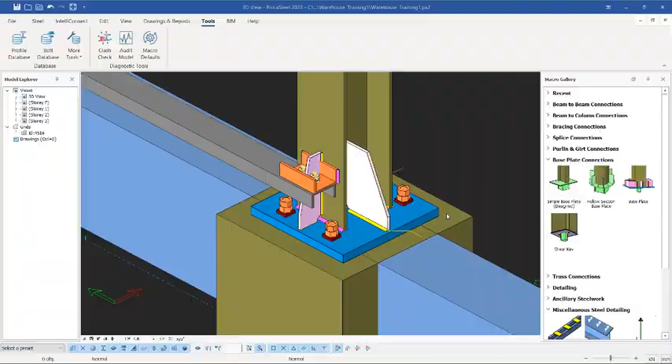We are going to be learning how to create a base plate with stiffeners, just like this. If you check closely, you'll notice that this stiffener is actually clashing with these cleats right there, so we are going to be correcting this as well.

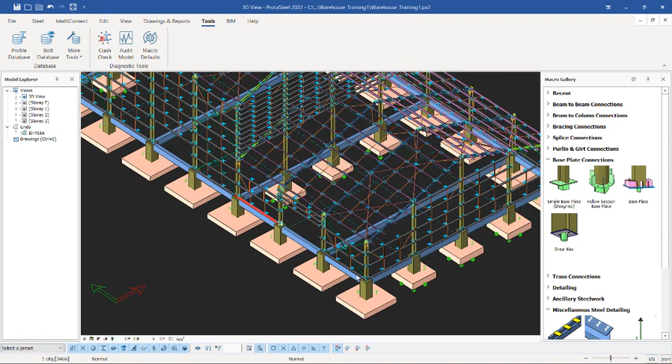In the next lesson, we will learn how to create drawings. I don't want to use this structure to create drawing because it is too large, so it's going to take longer to create drawing with this. I'll use a simple structure to actually show us how to create drawings in Prota successfully. But for today, it is base plate, and to correct this, we are going to be making progress into the presentations.

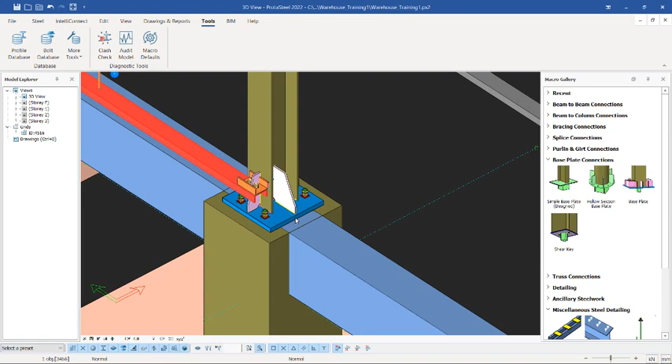So at first we will navigate to the next base, where we will be placing the base plates. Let's say, for instance, we take one of these. Let's say this one. Now, if you check over here in the macros gallery, you have base plate connections right there.

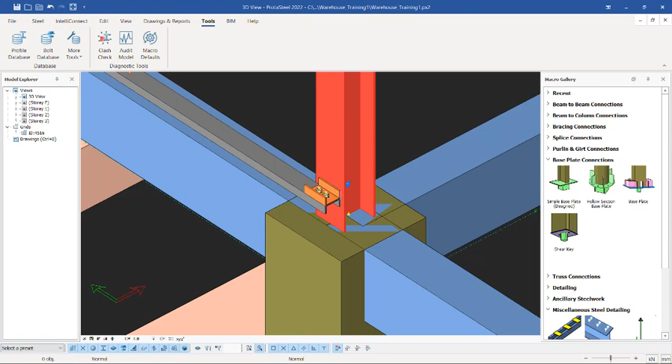Various options, but this is the one we will be considering. Once you pick on this just once, come over to the stanchion right there and click on the stanchion. You have it placed like this. At default, this is what you will have as your base plate. You can see this other one is actually edited, and I will be showing us how to do that successfully.

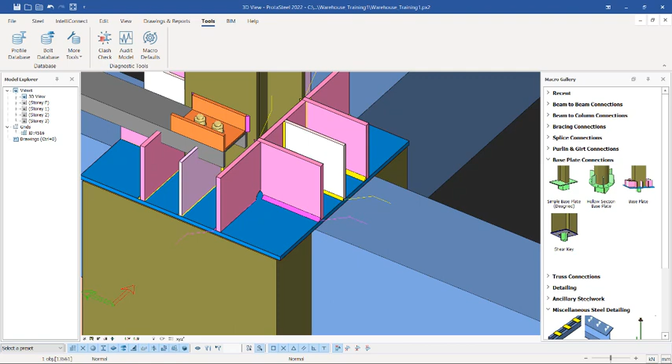Having placed this like this, what you just need to do is select the plate itself and then hold the control key plus M on the keyboard. This has selected the macros that form this plate successfully. Just hit the enter key on the keyboard and give progression time for the macros gallery to come up just like this.

This is the macros dialog. Get back to the figure right there. In this figure, you will notice some stiffeners here. This provision is meant for the stiffener, and this provision is meant for the base plates and the stanchions. How offset you want the base plates to be from the stanchion, you set it out here, but we'll be doing some setting right away, so I will be showing us what we will be doing right there.

So we have the first one, P4, which is the first stiffener, which is this one. We didn't need it, it is this one you see here, this one, so we need to uncheck here to get rid of that. We also didn't need the one at this point, which is P1, so you uncheck here. By the time you click on apply, you check the changes in these provisions. So I click on apply right there, and you can see the changes. So we are not having the stiffener by the face and the side of the stanchion successfully.

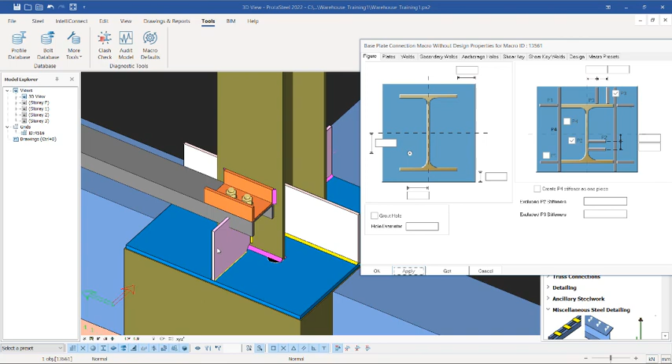At this point, we want to have an offset of the end of the base plate from the stiffener to be 100, so you can click in right there, 100. This is the setting that I said we are going to be doing in this presentation.

Having said this, you now go to the plate itself, over here in the plate end plate thickness, so we get the plate thickness. It depends on what you want; I want it to be 20.

Then you have P1, to be 10, which is stiffener one. P2, which is stiffener 2, to be also 10 as well. Stiffener 3 to be 10 as well. All right, so these are the stiffeners that you see here, stiffener 1, 2, 3. The first stiffener is the one we actually deleted.

Now, the first height of the stiffener we will take it to be 250. The distance between the stiffener and the end of the plate, we take it to be 10 millimeters, and then the second height of the stiffener, it is going to be 50 millimeters. So we come to the chamfering of the stiffener, to be 50 as well for this one. This provision will still be 50, and then we still have a 10 right there, and over here we will have 50 right there.

Okay, just like this, and then we have, let's take this to be 100. So this one now is this stiffener here, the one at the other face of the stanchion.

So we click in over here of 250, and then we still have 10 right here, and we have 50 here, and over here we have 50 as well. Okay, so this is the stiffener settings.

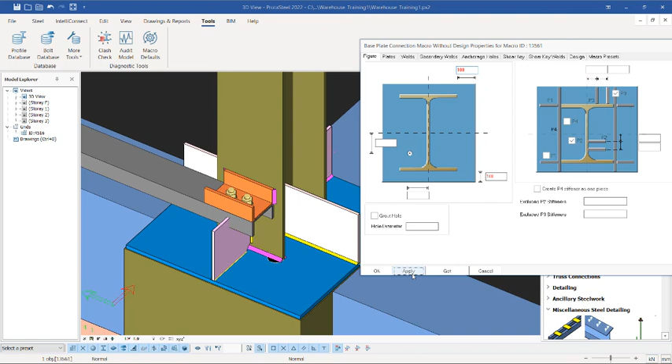So the next thing we will be considering, after making all of these changes, you have to update - click on apply to actually update. So now we apply, you can see the changes right there, successfully, just like this.

Then if you come over to the plate, these changes as well is being applied to this. So if I click on apply it, you can see that it's been applied successfully. I'll go back to the anchor bolt, then I'll make my changes right here.

So I have already checked this plate type 1. The plate type 1, the holes that are in right there are within the stanchion's perimeters. So if you come over here, you can see P2 right there - this P2 simply means you can create a hole outside of the stanchion successfully.

So we will be having a distance from the center of the stanchion to the first hole. We have it to be 40 right there. Okay, so over to this side, we still have it to be 40 as well - 40 millimeters, all right.

So if, for instance, we have it only 2 holes, which is for this plate type 1, just have to click on apply right there. So you have a hole right there - you're not seeing it, okay.

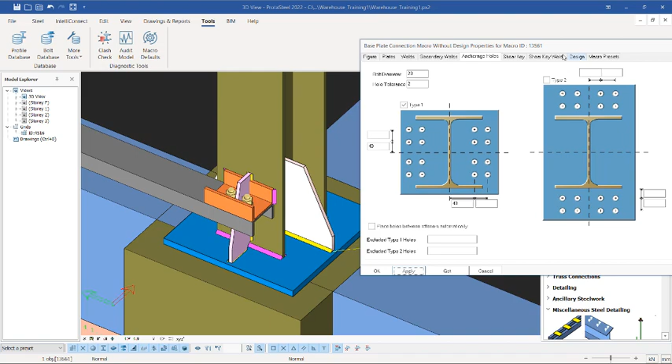But by the time we finish this now, for instance, I close this and we turn this, you see the holes here, one right there and the other one, which is 2 holes, which I think is okay for this stanchion. But if you want to add additional holes, maybe outside of the stanchion, I will be showing you what you do.

So select the plate again and then do the Ctrl M right there and then enter on the keyboard to bring up the property dialogues of the base plate successfully, just like this. Okay, so after which, if you want to apply another hole outside there, you can just check this type 2 right there.

And then key in 40 here, click on apply, so it will give you a hole in line with the other one that is inside of the stanchion.

All right, so if you want to have another hole, maybe multiple holes, or you want the spacing to be changed, you can actually change this 40 to change spacing. But if you want to add the additional hole and the spacing of 40 in that direction, so you can just click in 40 from this point and click on the apply options. So you have about 4 holes in that direction.

So if it's closed here now, then click on apply here, because we are good to go with this. Okay, so click on the OK options.

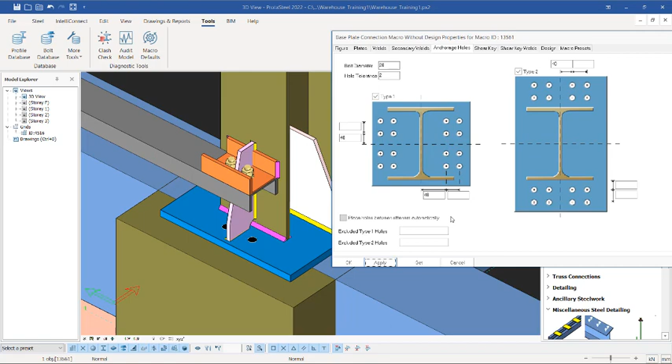If you click on get, this setting is going to be saved to this program successfully. And once it's been saved, there is no way you can set it again. You just use it to place all the provisions you are supposed to have your base plate successfully. So click on get and apply that.

Okay, so just like this, you now have this, so you can turn this and see the number of holes - 4 holes were placed. Okay, so after which, the next thing you will do is to place your anchor.

The anchor bolt - so you right click on the anchor bolt, so it takes you to the anchor bolt property dialog. So over here you can set the length of the anchor bolt, you can set the diameter. The diameter here is going to be 20 because it is the 20 holes that we created with 2 millimeters tolerance. Okay, so we are okay with this.

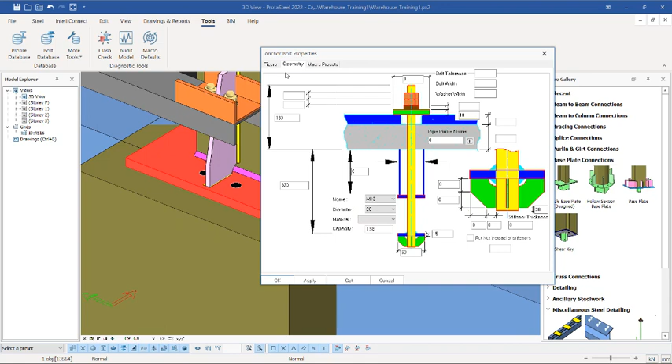Can go to the figure and be able to change the type of anchor bolt to C type or simple type.

Let's use the simple type. After which, click on get, apply, and okay. Once you do that, pick this anchor bolt again, right click right there and pick the plate to insert the anchor bolt, just like this. This has been placed successfully, you can see now.

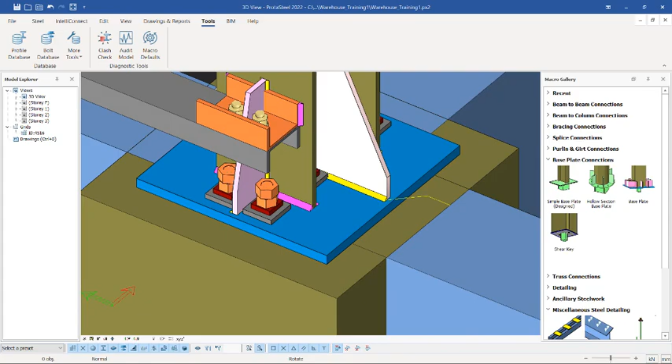If you want to continue to place these base plates right away, you can easily come over to these provisions and then pick the base plate, select this stanchion to place it. After which, pick the anchor bolt, just as I've told you earlier that we have saved it to the system, so we wouldn't have to make any changes anymore.

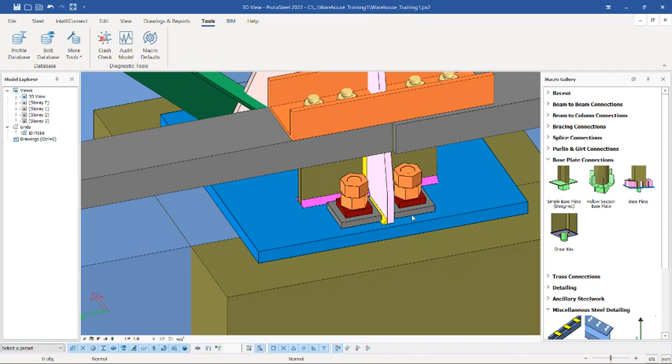But if you check, many things are clashing right here, but I will show you how to resolve this clashing, which is the next thing we are going to be looking at in this presentation.

Having got this successfully, we are going to be removing these connections first, at this point and this point. Once to remove this connection, you can't just select it like this and remove.

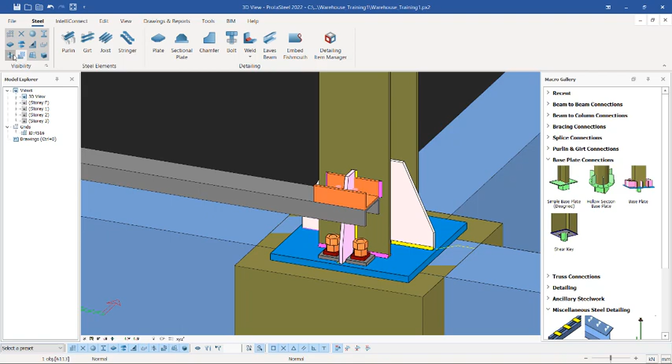You have to activate the macros. If I go to the Steel right there, see these macros, this one. Click on it, so it shows like this. This is the macro. Select it, right click, and then click on delete right there. Options to delete the macros up, and then come over here and do the same thing with this macros up, just like this.

Since we're having this clashing here, we're going to be moving this upwards. To move this upwards is not a difficult task. You just have to double click on the girt right there, come over to where you have the Z direction, which is the upward direction. You prefix minus maybe 150 right there, let's check 150 and see how it goes. You have to prefix 150 in both start and end of the girts, just like this.

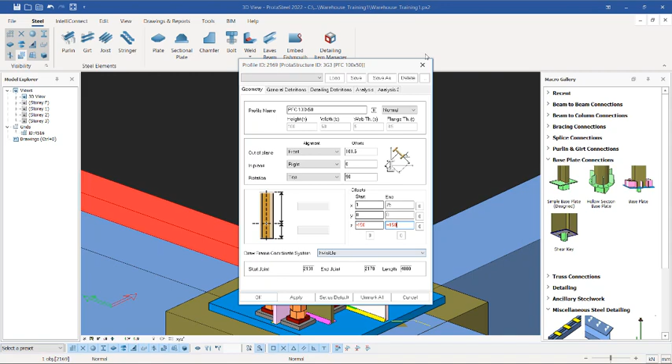After which, let's move it this way so we see the movement of that. Click on apply, so once you click on apply, click on OK. So you notice this did not actually move. Let's double click on this. This side I moved, this other side did not move.

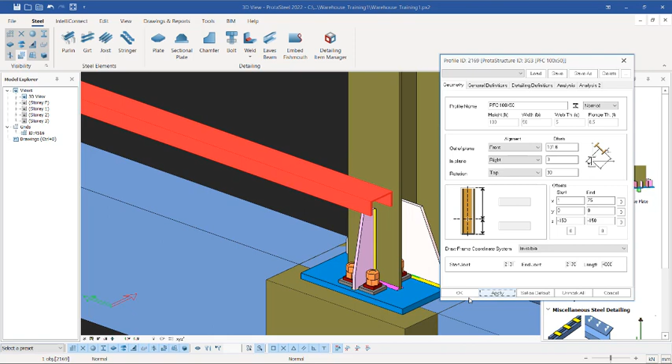Let's key in minus 150 again, just like this. Click on apply options like this. So you have it moved to this point. So you have to now check if this is clashing. You can see it's no longer clashing, so with this, we are good to go. Click on the OK option.

So this is how you offset this. This offset you've done here, you also do it over here to have this in line with this one we have already offset successfully. So with this now, you can start to carry out your brace connections.

Okay, so you come to these provisions, not this one. We are going to be using the girt connections. Purlin and girt, this one, so you can click on this.

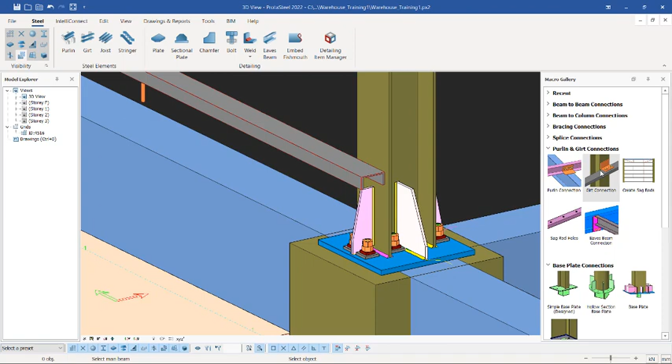Depending on the conditions you want to use, is it the clip angle you want to use? You can use the clip angle. It depends. When I click in these provisions now, it will take you to where you can navigate and select angle type or bracket type. Let's use angle type. For anytime you select angle type, you have to click on the reverse clip so that you can be able to place it, otherwise it is not going to place it.

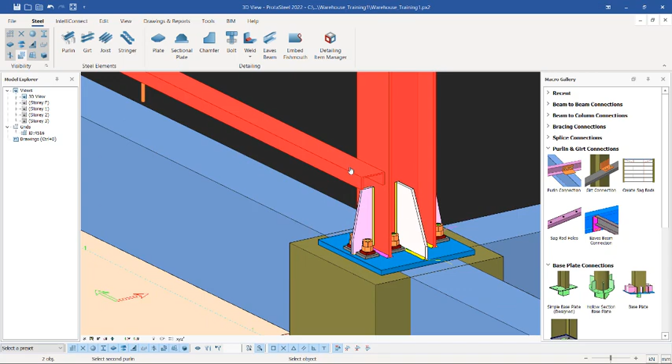So select this and this, and then right click to have it like this. You can see this is the angle clip for your girt connections, just like this. All right, it's very modern, just like this.

So this is what we are to cover in this presentation. Just as I've said earlier, I will do a full video that will explain all these processes, including how to actually publish or create direct drawing and publish in Prota Structure.